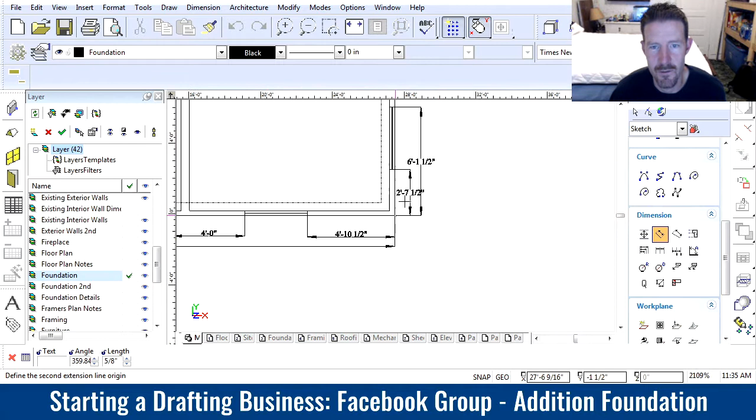Now, some of this is a little unnecessary for this particular project because this is the existing house, so I don't really need to draw all the dimensions of the existing house. I really only need to draw the dimensions of the things we're going to add, like this window and the addition.

All right, what's going on with this window? It's 4 inches off. I'm going to delete it. Well, maybe I can move it. Let's try moving it first.

I'm just going to come up here and press M on the wall edge, make sure it's in the middle of the wall. Of course, it didn't work. It put it in the middle of the old window and the... okay, that's funny. Okay, let's delete that.

Let's put it in again. Let's make sure our window's the right size. 4.5 by 3, I think that was a 3 by 3 window. Alright, let's try that again. There we go.

Alright, now this stuff is off for some reason, so we're just going to move it down 1, 2, 3 inches with the delta Y function. There we go. Not sure. Okay, clean that up.

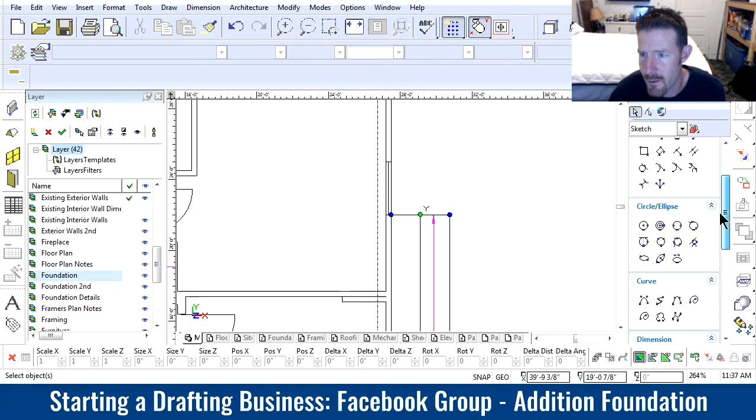Sometimes I feel like I'm in another dimension, especially lately. So I'm wondering if I should just talk about my personal life while I'm doing this. Look at these happy little dimensions - it could be like, was it Bob Ross? Let's just put a happy little dimension in here.

Show what it's about. Okay, so this one here. Alright, so that's a good indicator of what the existing house is.

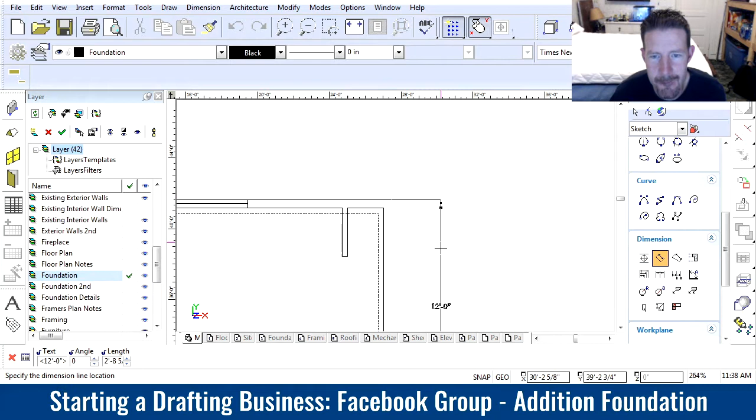The addition - line those up. No. Right there, here we go. And then the overall. Right there. Okay, here we go.

Now when you press V, sometimes it goes to the vertex of your dimensions. So I like to zoom in on the corners sometimes just to make sure we get all these lined up where they need to be.

I'm going to come check out the top. Alright, more foundation stuff. Get these in here. A wall, thank you. Oops, I'm getting in a hurry. There we go.

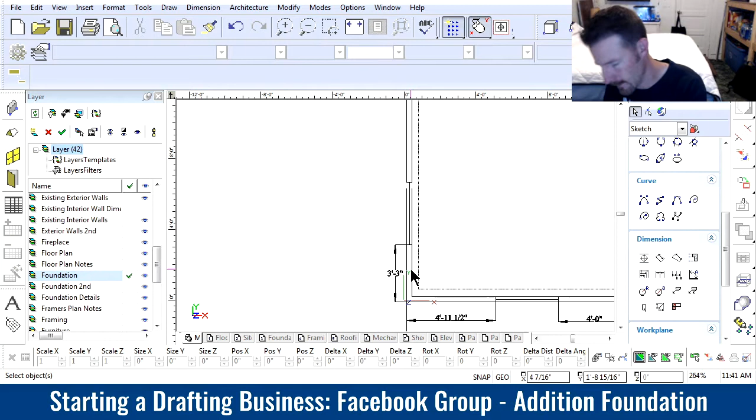Where's my cheat sheet? I don't have it here on my desk. I believe this was supposed to be closer to this side, 2.6 or 2.7 or something. So I'm just going to move this down the window that it is. So 1, 2, 3, 4 inches. Delta Y.

Now, I should probably go back and look for my notes and double check these, and I might do that. But at the end of the day, it probably doesn't matter, because this is not going to change. This is the existing. With this type of project, you really only need the stuff that's changing. You don't really need to add this other stuff. I probably should just leave it off, to be honest, because it's probably just going to be noise to the contractor. But I think it adds something.

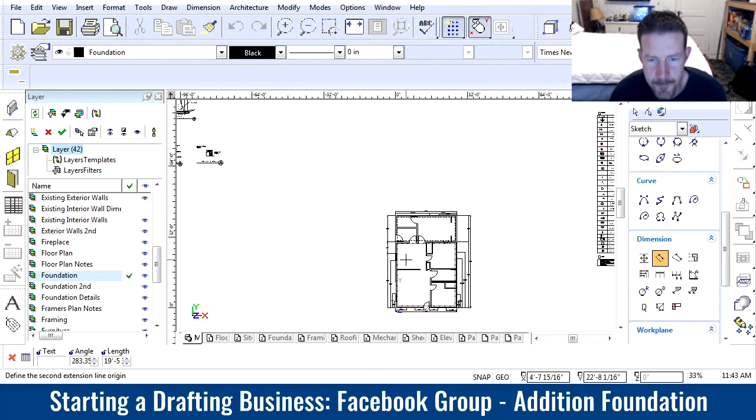What the? Alright, I did the overall dimension on that side, but I think I'm going to do it on this side too. There we go. Come on, there we go. Alright, down here I'm going to fix this up a little bit too. I mean, it's good that what we have here, but I want to add this part.

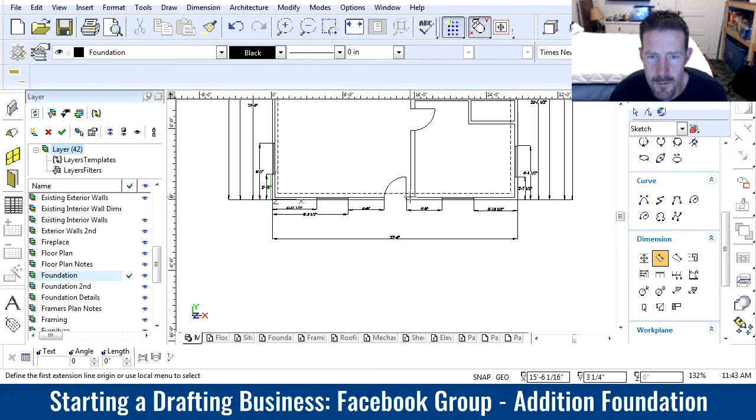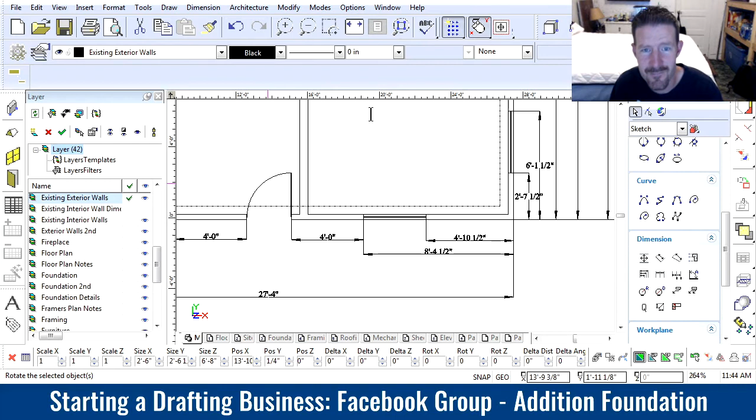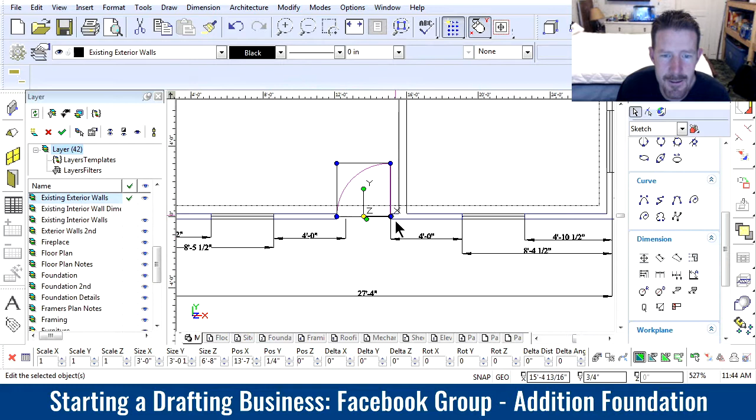This door, we need to fix this door. It's supposed to be a 3-foot door. I think I'll just leave it. Well, maybe not. Yeah, let's change it right now. Properties. There we go. Now, I don't think that we can change this side because of the way that it looks. So I'm going to move it 1, 2, 3 inches to the right. I'm sorry, the left. And I'll leave all that stuff the same. It's this stuff right here that has to change.

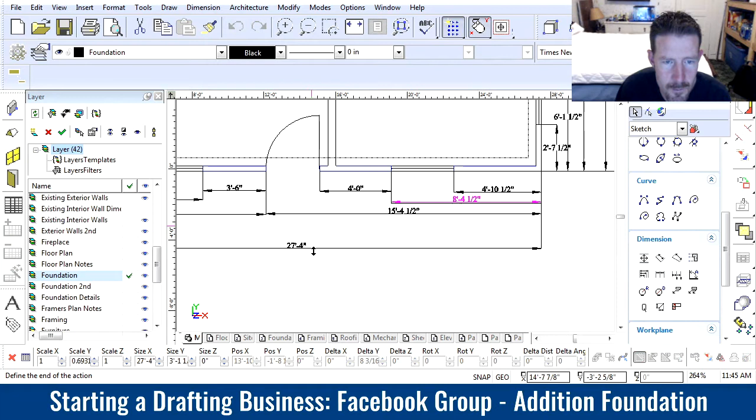Let's clean this up a little bit. There we go. Bring this up. Alright, so there's the foundation. Pretty straightforward. We might need to put some notes in here, like existing home to be moved.

Now let's put the floor joists in here. Now this existing home, when they go to move it, they're going to need to put some jacks underneath it in different places, and I have no idea how to indicate where those are going to be. They're going to have to do it in the field, so I might need to put a note in there to say that. Okay, in here we're going to put the floor joists.

So the floor joists are going to be rectangles, and they're going to start on the edge right here. And the joists are going to be 2x10s or 2x12s. Probably 2x12s, so we'll come in here. And they're going to stop right here. So a 2x12 is 1.5 inches. I'm just going to do an eyeball here. There we go. Now again, we're going to use that copy function, and we're going to put them.

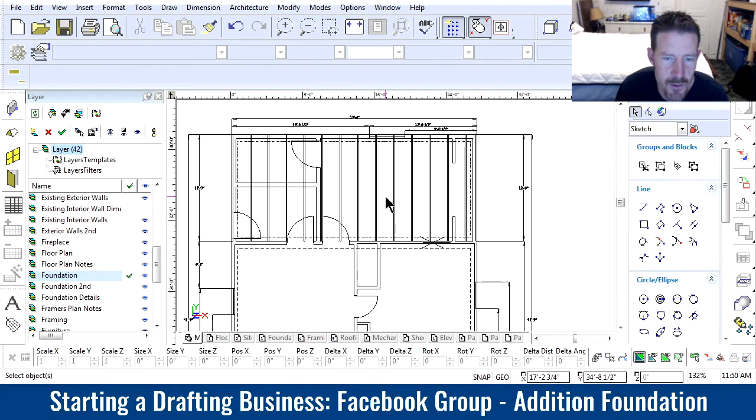Alright, great. Now this last one is going to be lined up with the wall. Not quite 48 inches. So then what I'll do here too is I'll put a skirt panel right here at the end.

So then I'm going to need to move these in a little bit. Let's start with this. I forgot what it's called. I wish I remembered all this stuff off the top of my head.

Okay, what I'm going to do is I'm going to go back to that one and look at it. What did I call that? It's called a sill plate? No, it's a fascia plate. Yeah, it's like a fascia. Sure.

Alright, so I guess the fascia can be on the wall, on the flooring too. Alright, 1.5 inches. So this is the fascia right there.

And I'm going to go back through and make all these smaller, because they're going to butt right up against that. Whoops, that's not what I wanted to do. There we go.

Because we're going to put a 2x10 along the back of the house to frame all this in. Otherwise, you'll have everything exposed. And when you're doing the rest of the wall, you don't want to have that part exposed.

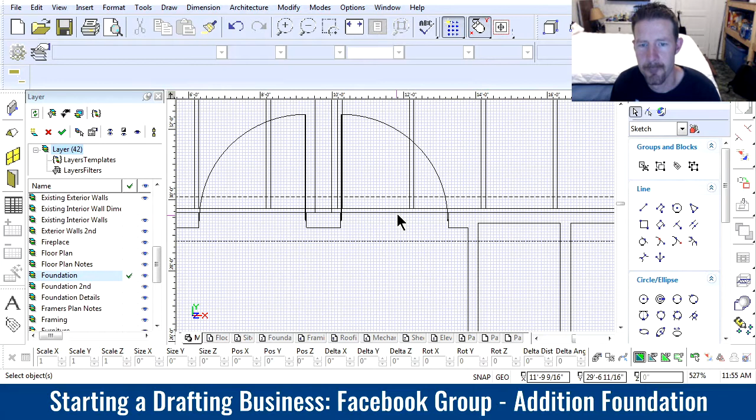So also with the foundation, we're not going to show the interior walls. So let's hide those just so we can get a better idea. I'm surprised I didn't remember that earlier. Existing interior walls. Boom. Addition interior walls. Okay, great. Awesome.

Okay, so I'm going to put some labels in here. I'm going to start with the dimensions of this joist here, just so you know how long it needs to be. There we go. 11 feet 9 inches because we got the other ones on there.

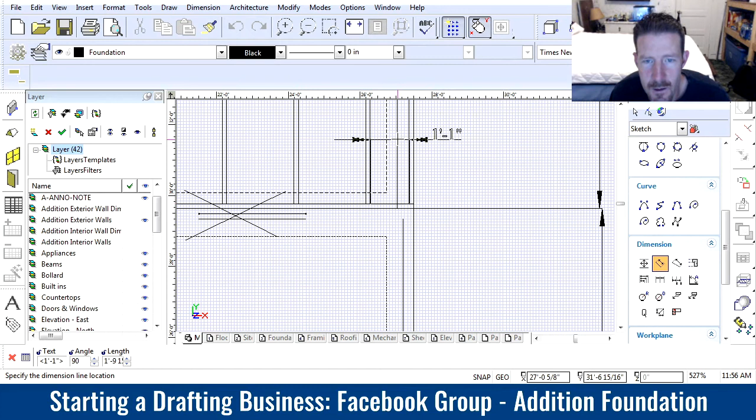And then I'm going to put this one here, the distance here, 1 foot 1 inch, and then I'll put a note and with words here.

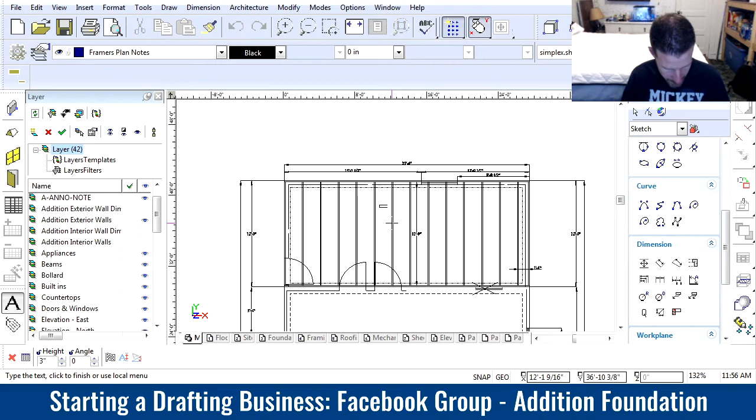Yeah, right here is fine. 2 feet. O.C.

Okay, great. So they'll build a stem wall, set the existing house on it, then the new stem wall, they'll set this frame on it for the flooring.

Now we could do a concrete pad back here, but I like the idea of staying consistent with what's already there. And to make sure that this doesn't have a step up or down, I need to try to figure out how big these existing floor joists are, so we can try to match them up the right way.

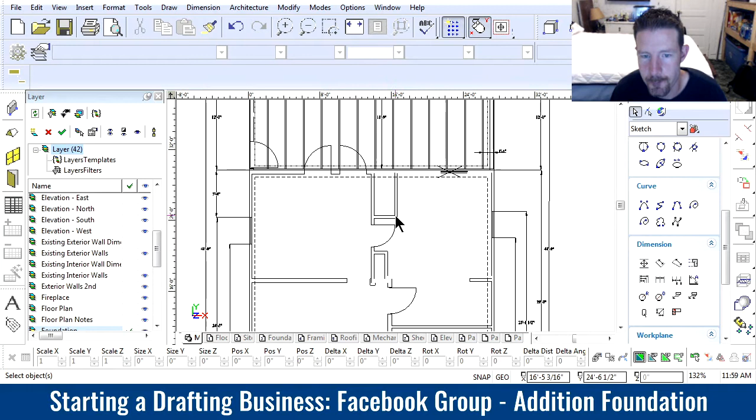Alright, so again we're going to take out these interior walls. Interior walls, interior walls.

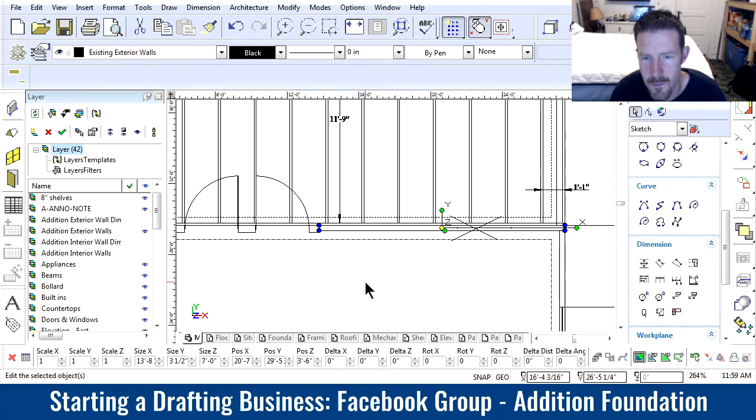What happened to this wall? Is it an interior wall or something? It's still gone. Is it an addition? Interior wall? It is. This wall needs to move back to the existing exterior walls. Addition interior walls, okay good. Every once in a while that stuff happens. You have to redraw a wall or something and you forget you're putting it in the wrong layer.

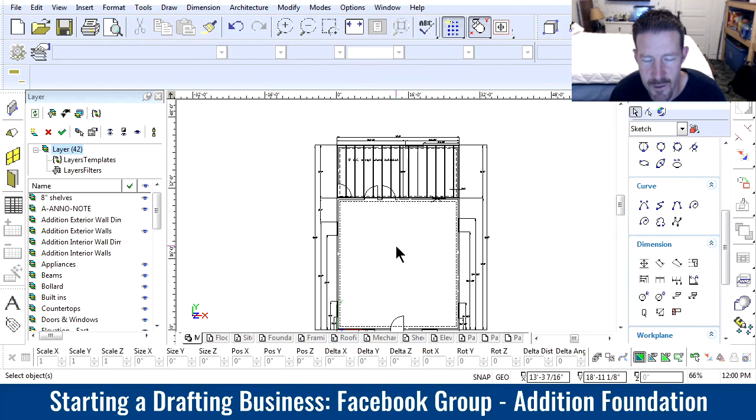Alright, so this is pretty much all we have to do for the foundation of this one. I'm going to need to draw some details. Let's see, do I have anything like it?

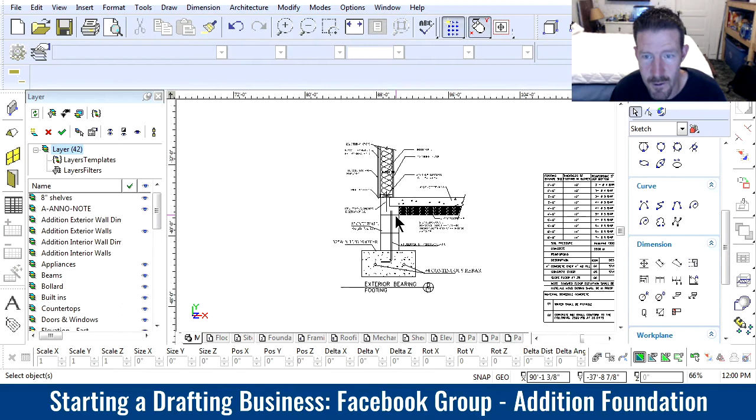This is one of the ones that's similar. See, it's got the brick wall here, the CMU wall, and then instead of the pad here, we put the floor joists. Let's see, is this another version? No. No, yeah, it's got the CMU wall in it. Here we go. This is pretty much what we're doing.

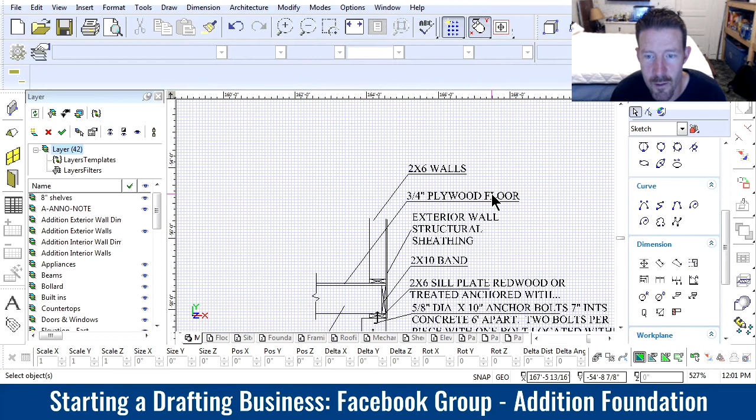We're going to put the sill plate here and attach it to the concrete. And then we're going to lay our floor joist on it, 2x10s. We're going to put a fascia or band - that's the word I was looking for, band. We're going to put a band around the outside of it. Then we're going to put our wood flooring. And then we're going to attach our 2x6 walls right to that, right through the band and the joists. Okay, yeah, so this is pretty much what we're going to be doing.

So I probably don't even have to draw a footer because this is it. It's got the wall, yeah, this is it.